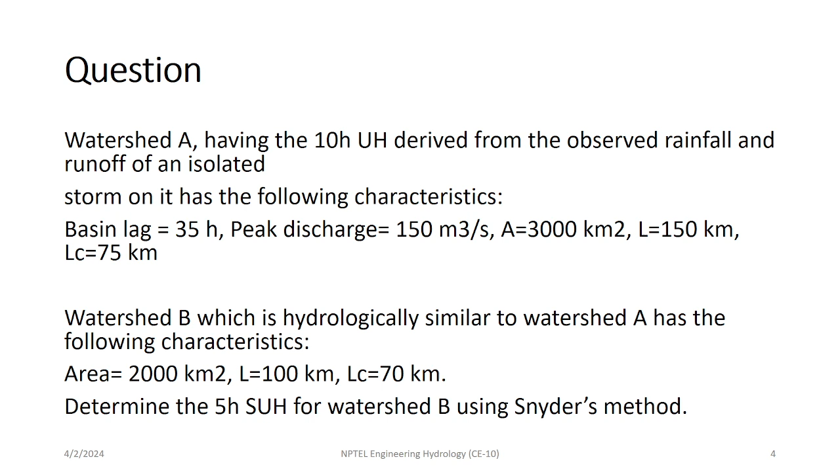so here the question was how we can plot a 5h synthetic unit hydrograph for watershed B using Snyder's method. Whatever procedure we have followed, it will be the same. The difference will be the approach, how we plot it. So I want you to just look at the procedure, how we are going to solve it, and later you can execute some of the problems for your deeper understanding.

Okay, so here, whatever plot we have to make, the entire question is divided into 8 or 9 steps, and within these steps we will look step by step at the major parameters we have to determine. Here you can see the first one is watershed A, and its properties are mentioned here. Basin lag is given, peak discharge is given, area is given, length of the catchment is given, then length of the catchment to the centroid is also given.

Then for watershed B, it is the required hydrograph. For A, we already have a unit hydrograph. So how are we going to convert? I'm sure you know what we need to do in order to plot a required hydrograph: we should have two major coefficients, right? Can you name them?

In the earlier question we computed two major coefficients from the known watershed, and then transferred those coefficients to the unknown watershed, right? Those coefficients were Cp, and one more, which one? Cp was the coefficient for peak discharge. Then there was Ct, related to time, right? From here we were getting the basin lag time, then time for the peak, and using Cp we were getting the information about peak discharge.

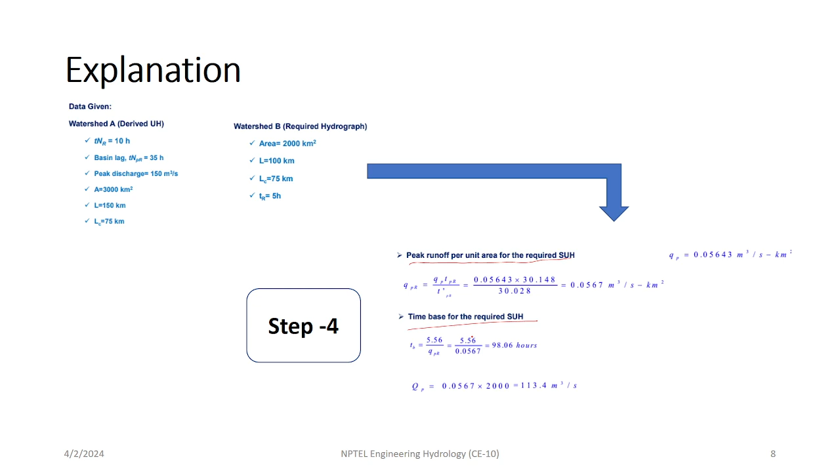Then peak discharge has been computed per unit area, and time base we have got for the required unit hydrograph. So based on that we could have an idea of how much peak it is going to. So we will have the maximum ordinate it can go to, and basin lag we already have, so accordingly we can compute the base width, base period, how much maximum width it can attain.

Then if we want to plot the SUH, it has mentioned that we should have three major widths. First one is this entire base period, time base, we should have this entire width. Then we should also have the width related to 50% of peak discharge. So this width we also need to compute in order to plot this graph.

And then there should be a known width for 75% of peak discharge. So if we have these three major widths, then we can easily plot this graph, though we have to smoothen it after plotting. So here you can see there are certain empirical relations given in order to compute the base width for 75% of peak discharge. Then for computing the 50% of peak discharge, it is given here. So using these empirical relations, we can derive these widths.

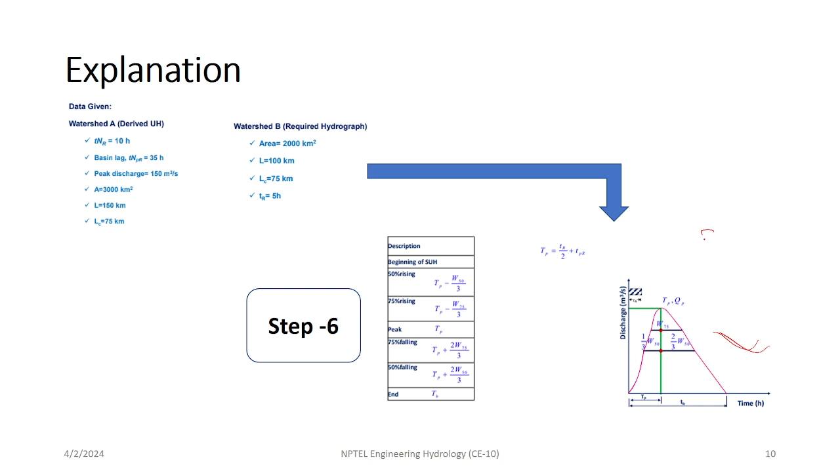Okay. Now after getting these, you can see the picture here. Now you can have some approximate plot of this SUH, synthetic unit hydrograph. Still it needs some correction. You can't say that whatever values we are getting are correct. One more thing I want you to note down: before attaining the peak, the width is taken as 1/3, and after the peak it is taken as 2/3. We have already looked into these things in an earlier session also.

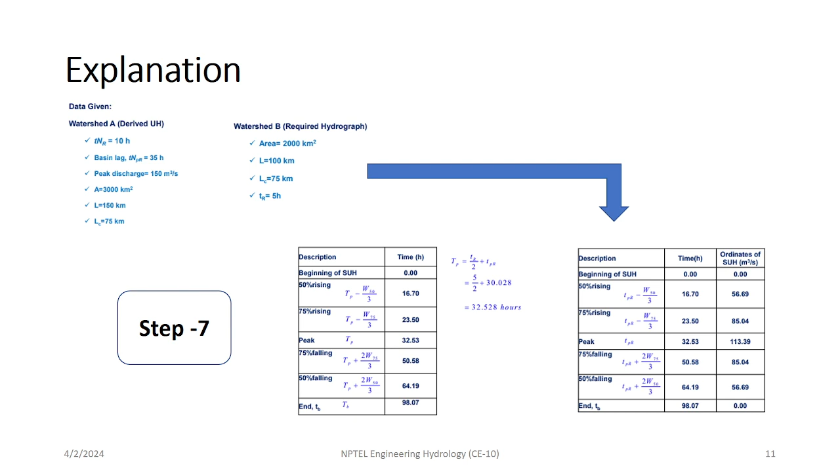So whatever values we have computed till now, values related to time, values related to width of the hydrograph, those values have been plotted along with the peak discharge, and this graph has been found. Now these are some details which have been summarized here. Okay, so this question ends here.

I hope you are getting the difference. There is only one major difference here: these width values should be known in order to plot this graph, else there will be difficulty. Because if you only have the time base value, you know the width only, and you are simply saying that I have a peak value of this much. So definitely here also you will be assuming a triangular kind of thing will be plotted. But you know that this triangle assumption won't hold everywhere.

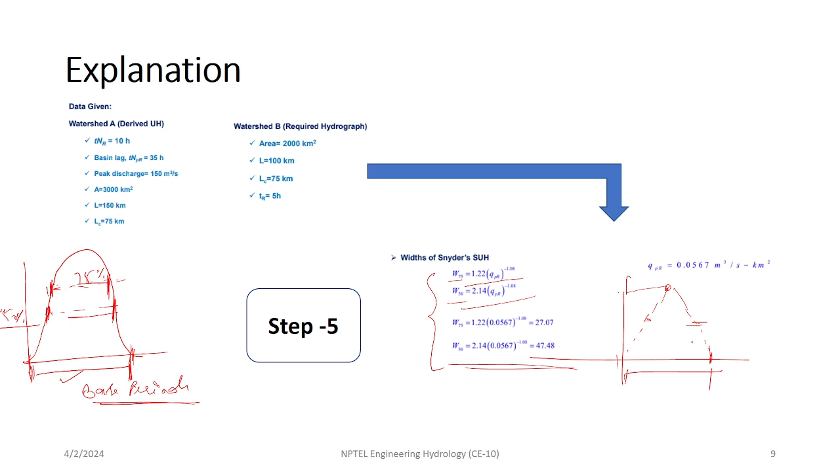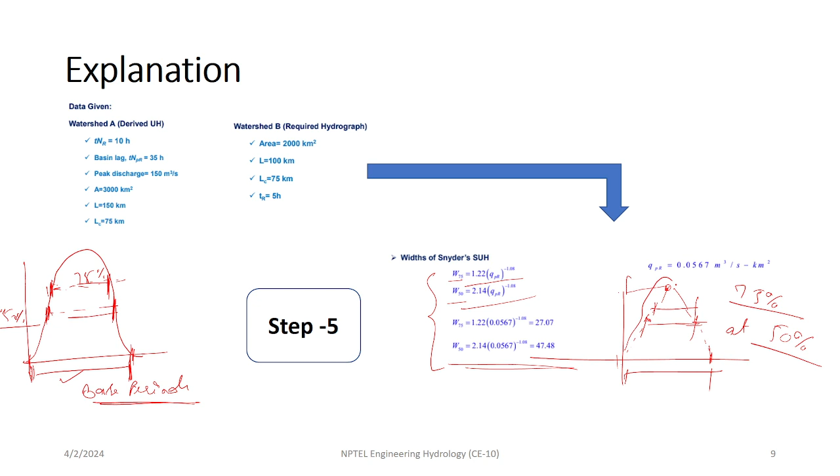So what you have to do is take some more values between these lines. So in order to make it possible, these widths at 50% of maximum discharge and 75% of maximum discharge have been computed, and then they have been plotted in order to get the smoothened curve. I hope you are getting this.

Now we are moving to the questions related to today's session. Today's session we are going to cover the topic of flow routing. I hope you all have gone through this concept, right? Routing. So I want you all to just give me a brief understanding, your understanding, of what you understand by flow routing. Okay, anyone?

With the knowledge of the upstream flood, getting a hydrograph at the downstream section of a river or any watercourse. Yes, right, that's a good one. Anyone else? Ashish, do you have any input? I think it represents the change of hydrograph when the water moves from upstream to downstream. Yes, right, yeah.

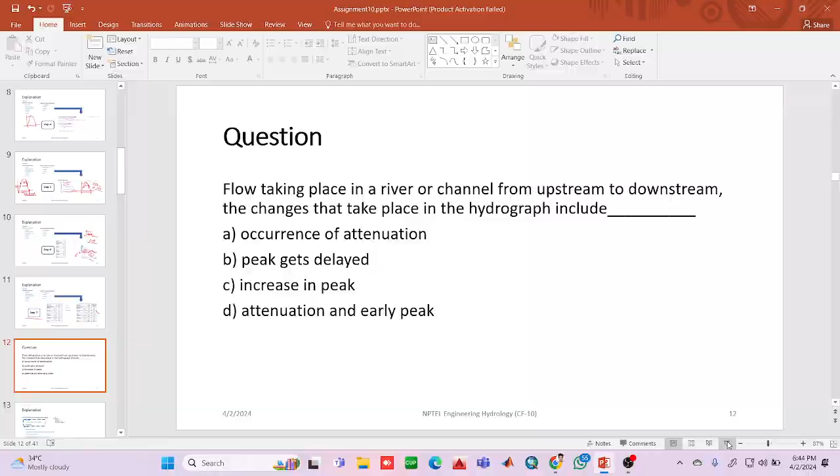So here the question is: flow taking place in a river or a channel from upstream to downstream, the changes that take place in the hydrograph include. So it is saying that if we have a channel and a hydrograph at this location, and we are trying to get a hydrograph either downstream or maybe upstream as well, what could be the possibility? What kind of things can exist? That is the question.

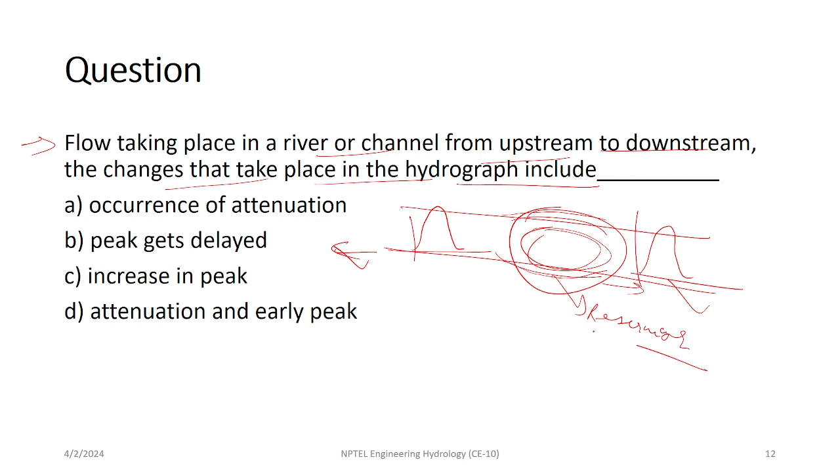So in that case, the width of the channel as well as the depression will be acting like a kind of reservoir. It will be storing a certain amount of water, and that is why it could have an effect in reducing the peak values. So whatever peak you are getting, a certain amount of water has been stored in the reservoir, and now you are having reduced peak values, right?

And also, whatever water is now going to flow after this reservoir, there is a chance that the peak values you are getting could get delayed also. So in this case, attenuation occurs. This entire flow routing concept is much more relevant in terms of reservoirs, because once the reservoir is constructed, the hydrograph will have more impact in its scale, right?

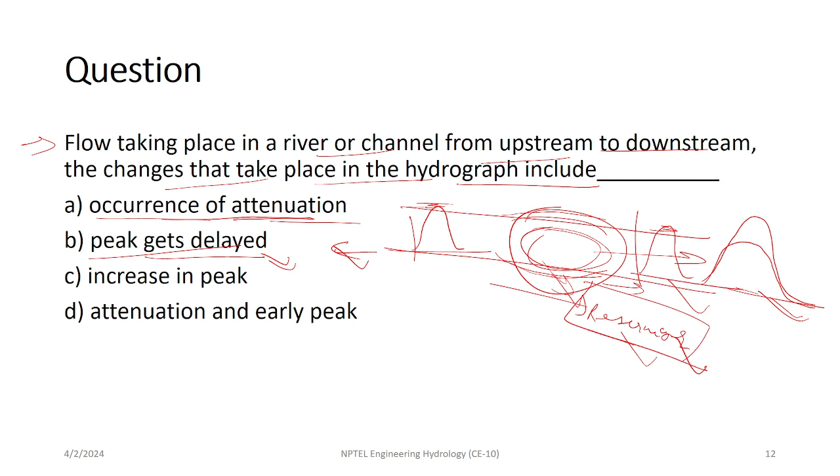Okay, so here the thing will be like occurrence of attenuation. Peak will be getting depreciated, and then another one will be a peak gets delayed. Okay, so here from upstream to the downstream flow takes place. So first aspect is attenuation, and the flow can also get delayed. And what are the applications of this? You can see here that if we are using a flow routing concept, we can easily derive a unit hydrograph as well as a synthetic unit hydrograph.

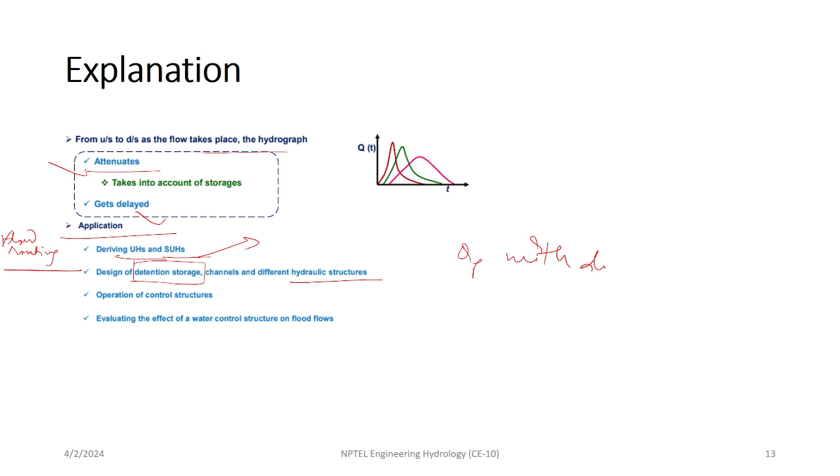Then why is this flow routing important? We can design a detention storage in terms of a hydraulic structure. Hydraulic structure could be anything, like it could be a canal, a culvert, or a dam we are making along the channel. So in designing those, we should have an idea about the peak flows QP with respect to the duration as well as length in the entire channel.

If I'm taking a section 1, section 2, section 3, what is the maximum QP I am getting, what is the width of the river here, and what is the duration, like time to peak. This information is relevant in order to design any hydraulic structure, because we have to control the volume of water that is coming as an inflow. So that is a task we need to do.

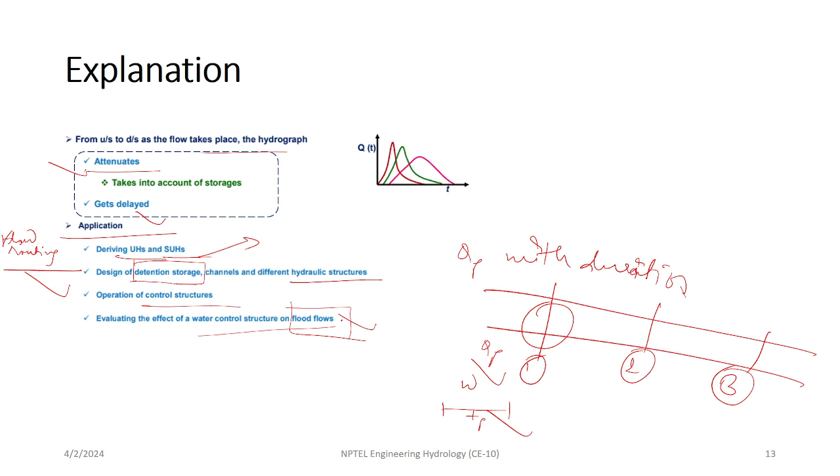So here it was also mentioned that control structure is also one of the things flow routing can do. And at the last, if we want to control the flood flows, in that case also flood routing is important. Okay, now moving to the next question. It is related to flood routing. In flood routing through a reach, the point of intersection of inflow and outflow hydrographs coincides with the peak of the outflow hydrograph.

So it is saying that we are doing a flood routing along a reach, and once we have plotted an inflow hydrograph, and then after some time the outflow hydrograph has been plotted. Okay, so here you can see there is a certain intersection between the inflow and outflow hydrographs. Wherever they coincide, you are getting a point of intersection. And what it is mentioning here is that this intersection point is the Q peak, the peak flow of the outflow hydrograph.

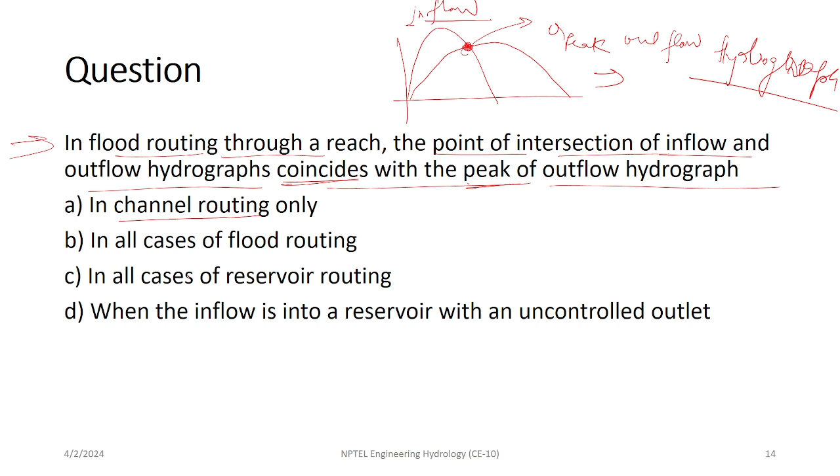So where could this possibility occur? That is the question. Okay. So I'm sure you may be getting terms like channel routing, flood routing, and reservoir routing. There are certain assumptions which are holding all these concepts together. So have you gone through this?

No, no. So here, flood routing we are plotting, right? So for this case, option D will be valid: when the inflow is into a reservoir with an uncontrolled outlet. Uncontrolled outlet means whatever the maximum volume of water

is stored by a reservoir, if it reaches this level. I am saying that a reservoir is there, and there could be a maximum flood level to which it can hold the water, because after that the structure is not going to bear the water pressure. So definitely there could be some engineer operating a spillway, diverting that water to the downstream part, right? So there could be some maximum value to which it can store that water.

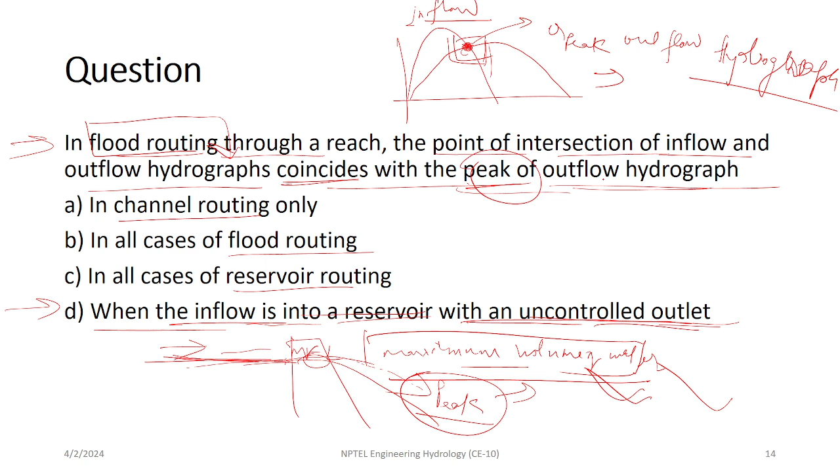So in this case, when the inflow is into a reservoir with an uncontrolled outlet, means inflow is coming and the reservoir is not holding any water because it is already at its maximum level, whatever the outflow is, that will be at its maximum value. The question was asking about the peak of the outflow hydrograph. When you are operating this reservoir at an uncontrolled flow, you will get the intersection point at the peak of the outflow hydrograph.

So look into some of the explanation here. Firstly, I just want you to see some of the basic concepts. During the rise of the outflow hydrograph, the inflow is greater than the outflow, so build-up of storage in the reservoir will be done. It is saying that inflow is higher than the outflow; in that case, build-up of storage will be there.

If there is a recession of the outflow hydrograph, means outflow is greater than the inflow, water will be getting depleted from the reservoir, so depletion of the storage will be there. In the third case, when the outflow hydrograph has receded, the reservoir returned to the initial level. So in that case, build-up of storage in the reservoir will be done.

In this box, there is one important line mentioned here: at maximum storage, outflow from the reservoir will be uncontrolled. Maximum storage means the maximum volume of water the reservoir can hold. If it reaches that level, whatever outflow you see will be uncontrolled.

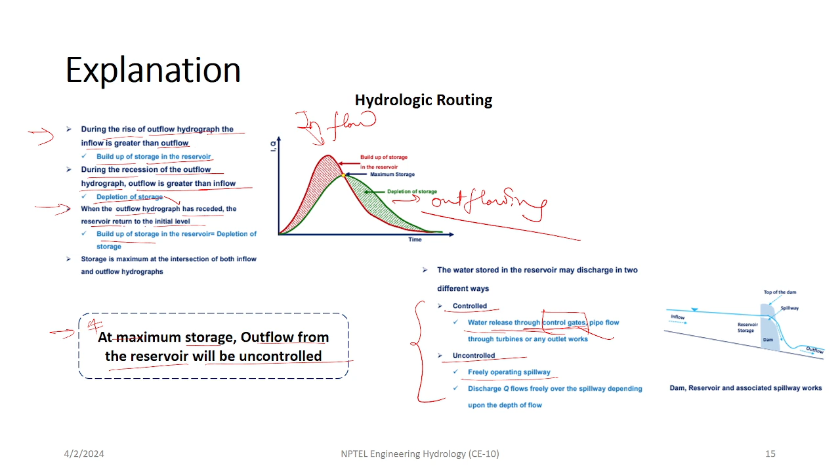You can see here some more keywords have been mentioned. When we say controlled, water releases through control gates. Whatever spillway gates are working over the dam, they work in a controlled way. But when we say uncontrolled, they are made to open, they are freely operating now, there is no control in the discharge. Okay, now moving to the next question.

The question is related to the Muskingum method of flood routing. You may have an idea about routing, right? There are two types of routing we perform. Tell me them. One is hydrologic routing. Yes, hydrologic routing is there, and another one is hydraulic routing. And what are the differences? I think hydrologic routing uses the continuity equation for calculation. Right, good one.

And in case of hydraulic routing, it uses both continuity and momentum equations. Combining both these equations, one famous equation has been derived: the Saint-Venant equation. Are you familiar with this equation? It is one of the most widely used equations to simulate the dynamics of a flood wave.

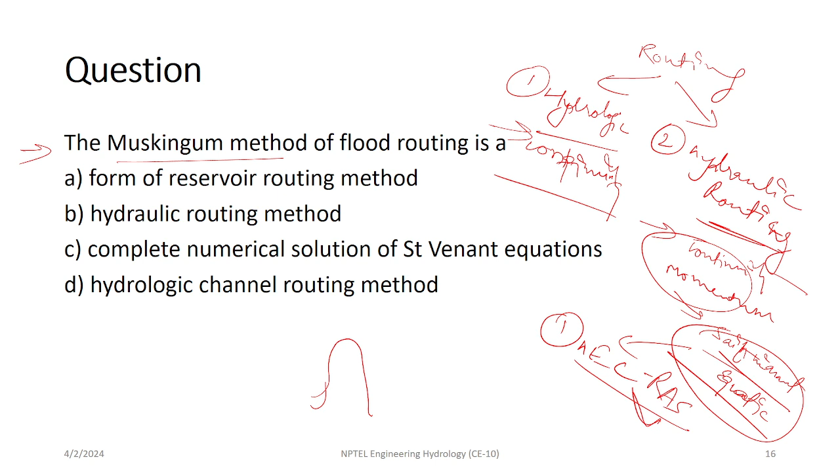How much time, if you have an idea about the hydrograph from the origin, where the maximum rainfall has occurred, and now at the outlet of this basin we have received a QP, meaning maximum discharge, of maybe 15 billion cubic, right?

15 BCM has been achieved, maybe after, you can say, 30 minutes of rainfall. Okay, I'm just saying it as an example. Now there is one city downstream of this catchment; you can call it Surat city. I'm just taking an example. There is Surat city in Gujarat. It is highly developed; it is an economic backbone of India also.

So this entire water will be diverted to a river only. And if a surplus amount of water is coming directly into the river and going downstream, where there is Surat city, then definitely there could be a possibility that the entire excess amount of water gets diverted into the floodplains of Surat city. And if there is no control over these river banks, then definitely this entire city would collapse.

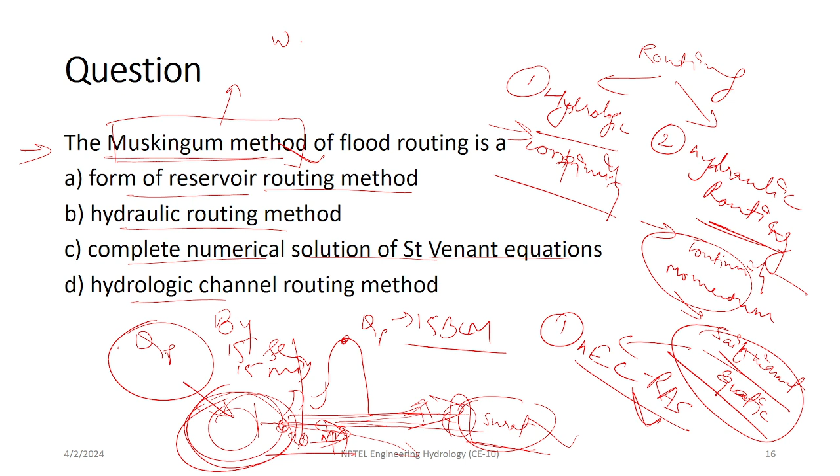With reference to this, I can add one more thing. You may have studied two major concepts. One was prism storage. Have you studied it? Have you come across this word or not? Prism storage. And there is one more word, wedge storage. These two words are used in the Muskingum method only. Okay. So this entire Muskingum method tells what? Any idea? No idea.

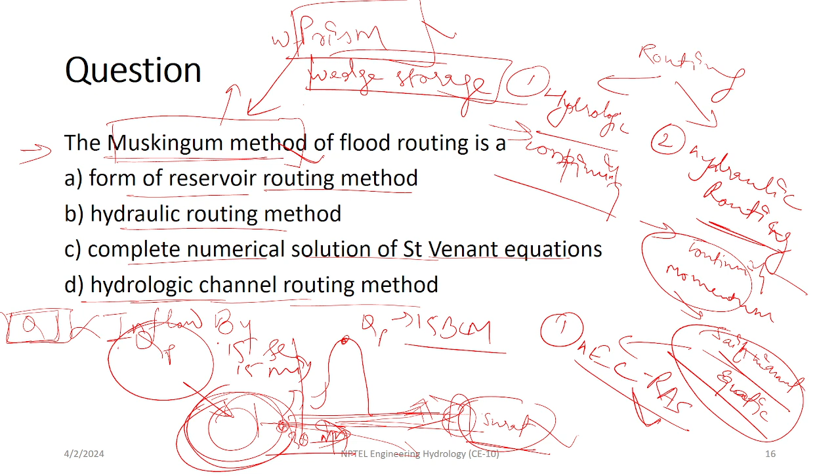So here the Muskingum method is a form of hydrologic channel routing method, where the outflow will have a relation with the inflow. Which kind of relation, we will discuss in the explanation. So here you can see the routing process is divided into two major aspects: hydrologic routing and hydraulic routing. In hydrologic routing we use a continuity equation or a flow-storage relationship.

This entire concept is a lumped model. Lumped routing in the sense that for the entire area we are getting only a single value. But if it is distributed, we are getting values at different locations also. So here you can also see that variation with respect to time is considered, but with space it is not considered. That is why, since there is no spatial variation, the word lumped is used. I am assuming that the entire basin has similar characteristics.

But if I am saying that in the region values are varying with space, if I move from one point to another, values are changing, then I will call it distributed flow routing. And for distributed flow routing, you should have an idea about the continuity equation and momentum equation, and if we combine both of them we get the Saint Venant equation. And it can vary in both space and time.

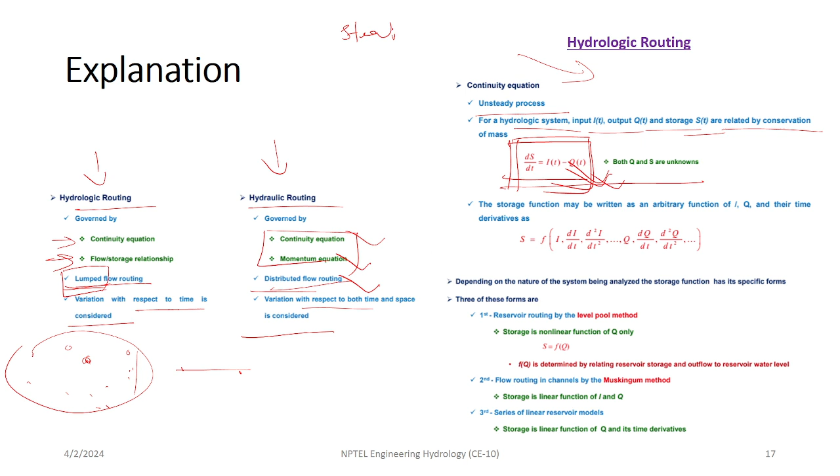See, the continuity equation can be divided into two major criteria. If I am saying steady state condition, like for each time whatever input is coming is directly converted into an outflow, in that case you all have studied what kind of equation we use. Q1 equal to Q2, right? Q1 equal to Q2. Am I right or wrong? Yes.

So whatever the inflow is coming, it is directly converted into outflow. But if I am saying that it is unsteady, changing with time, then the storage concept will be used. And that is why you will be getting the difference of inflow and outflow; it will be stored as storage. So for these kinds of things, the continuity equation in the unsteady case is important.

And see how this storage is varying; it is dependent on inflow and outflow. So this could be expressed in this form. After combining these two major relations, we can derive the Muskingum equation also. So these two major concepts have been used in the Muskingum method. We will see some numericals related to this also.

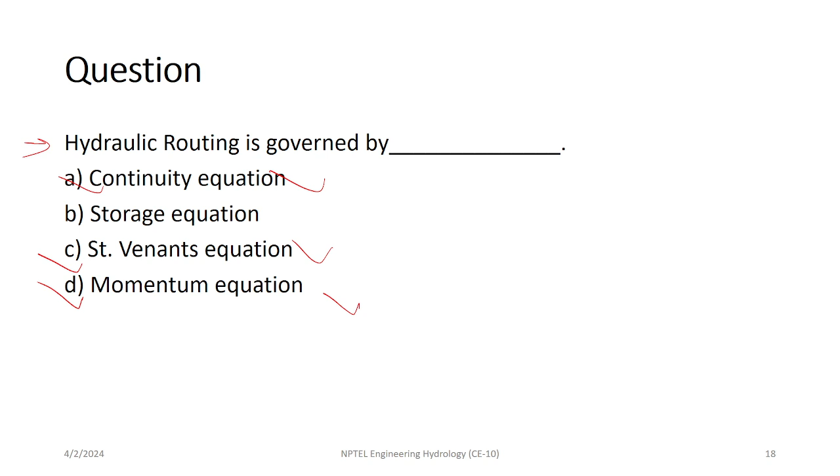Ma'am, is it clear to you? Yes, yes. Okay. It's clear.

How can you simulate them? Because if you are assuming or ignoring certain parameters, then you will have steady, uniform, or non-uniform kinds of scenarios you can develop and implement into your model.

So these equations are directly useful while we are modeling a flood, or the hydrologic modeling we perform in order to predict the volume of water distribution in the basin, where we are getting a surplus amount of water, where we are getting a reduced amount of water, where we need reformation in reservoir operation. In that case also these equations are much more relevant.

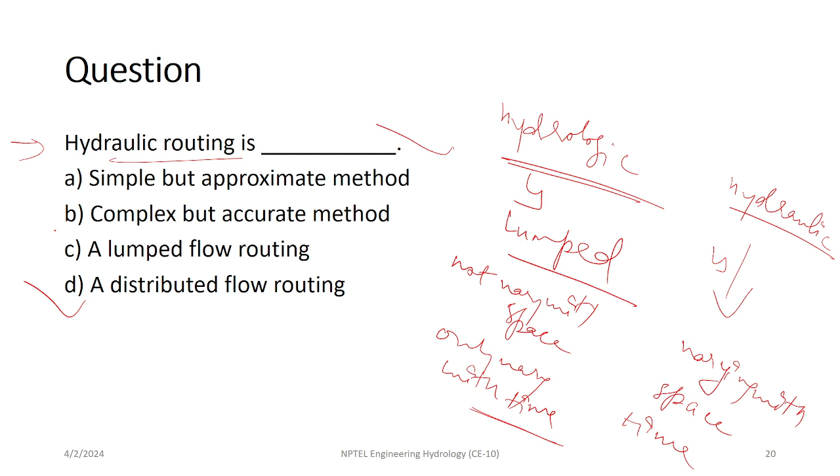So here, don't confuse this: it is distributed flow routing, and it is complex, but it is more accurate in comparison to hydrologic routing. So if you are talking about hydraulic routing, it is more accurate than hydrologic routing. A very useful method in distributed rainfall runoff modeling. Rainfall runoff modeling is nothing but hydrologic modeling.

Most people used to use a kind of water balance equation. You may be familiar with this water balance equation. Okay, so this water balance equation, and they are deriving the rainfall runoff modeling.

Now in the third option you can see simulation studies in the catchment. Just I mentioned there, simulation studies have been made. So in order to quantify the inflows, in order to quantify the outflows, and as well as the storage, these three aspects, if you want to model it, we can use the simulation studies.

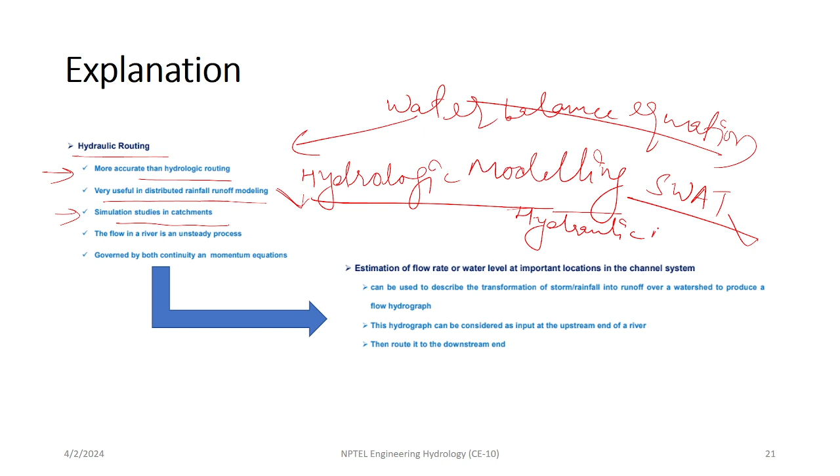From my point of view, I can mention, if you have not explored, there is one famous hydrologic modeling called SWAT, right? Soil and Water Assessment Tool. And if you want to simulate a hydraulic modeling, I will mention a model called HEC-RAS. Just I mentioned here HEC-RAS. You can explore these things.

Okay. Then there is one more thing, hydraulic routing, is that it is an unsteady process and governed by both continuity and momentum equation.

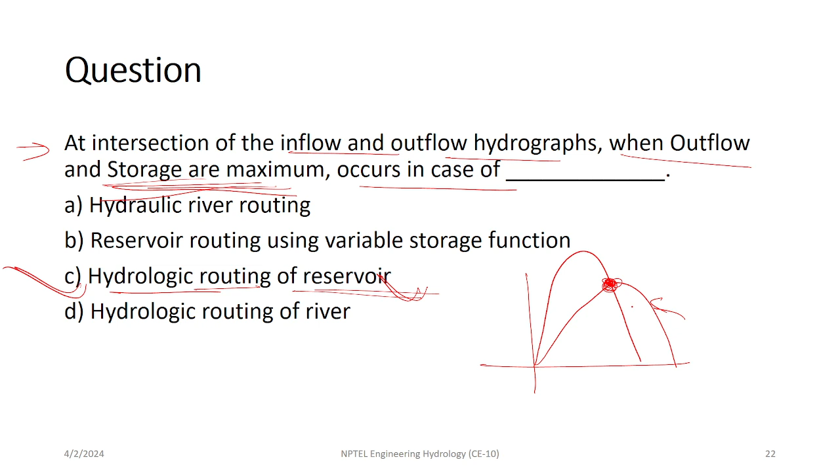So see here, this graph you can see here directly. First graph is showing the inflow, and then second graph is showing the outflow. So in the peak of outflow you are getting an intersection, and at that point it is mentioned maximum storage will occur here. At this level maximum storage of the reservoir will be done.

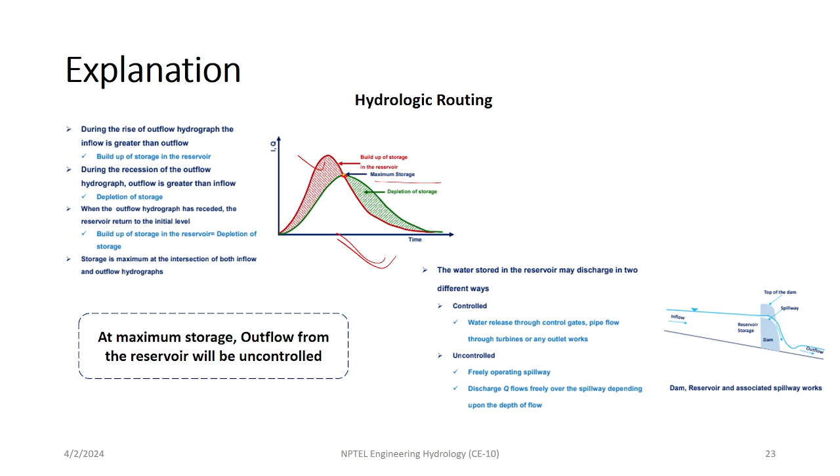Now people working nearby the reservoir, whoever is operating that reservoir, they will be seeing these curves, and once they are seeing that, there will be some indicator that now the storage is getting more than the threshold values. So it will be called an alarm. Now what kind of alarm? Because now people have to open the gates. Instantly they have to open the gates, because they can't store excess water after that storage. So these kinds of things will be more useful while we are operating the reservoir.

Okay, now moving to the next question. During the passage of flood wave, prism and wedge storage in a channel is. So I hope, just I mentioned that these two concepts are useful in the Muskingum method. Okay, so it is saying that prism and wedge storage in a channel is. So firstly you have to tell me what is prism storage and what is wedge storage. Any idea?

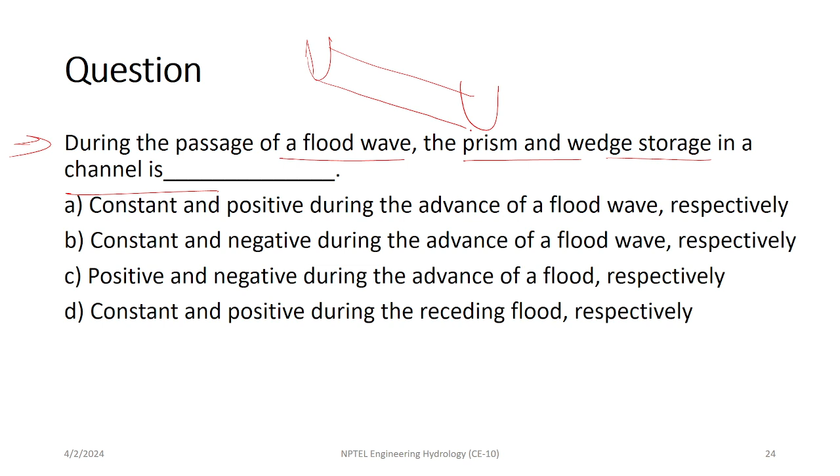I have just plotted a kind of flow scenario. So now from the base to the water level, maximum water level. Okay, if it is normal, whatever the inflow is coming and outflow is going, there is no additional inflow coming, it is called normal flow passing through a channel. In that case, whatever water level you are seeing could be assumed as constant, and this entire area you can call prism. Prism in the sense what? It is not changing.

Okay, then if any additional inflow is coming, surplus water is now entering this cross section, so you could have a certain kind of water level change like this. It could distort like this. In that case, whatever excess area you are getting in the form of a triangle could be called wedge storage. Am I right or wrong? So now it is asking about the behavior of these storages when a flood wave is passing.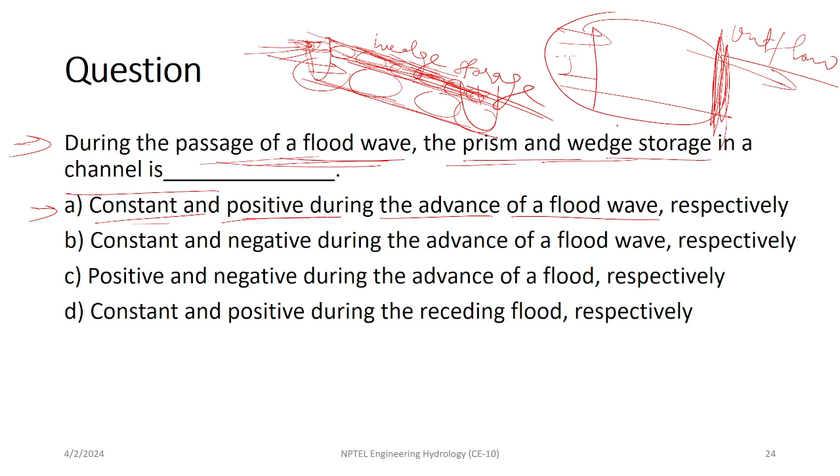Okay, so it was asking about the passage of flood wave, so here it will be constant and positive during the advancement of flood wave. It is asking about the upstream side only. Got it? Just the passing of flood wave, it is just entering the inflow section. If it said it is receding, the flood wave is about to pass out, so the behavior would be seen at the outflow section. But it is just entering this section, so that is why it is taken as positive.

Okay, now moving to some numericals. Regarding the Muskingum method, as I just mentioned, in the Muskingum method storage is a function of I and Q, inflow and outflow. So there will be some relation established, with some weightage to I plus some weightage to Q, and these weightages are given after considering two storages.

You have seen this word storage everywhere. In the previous question we discussed what types of storages are possible: first a prism storage and another a wedge storage. Giving a weightage to both these storages, we can achieve this kind of empirical relation, and this entire concept has been used in the Muskingum method. Weightages are nothing but coefficients, so coefficients have been given.

So do you have any idea related to the Muskingum method, what kind of empirical relation is there? Any idea? And what is the relation between these coefficients? There is a relation between C1, C2 and C3. Three major coefficients have been taken in this Muskingum method. Any idea? Can anyone solve this question?

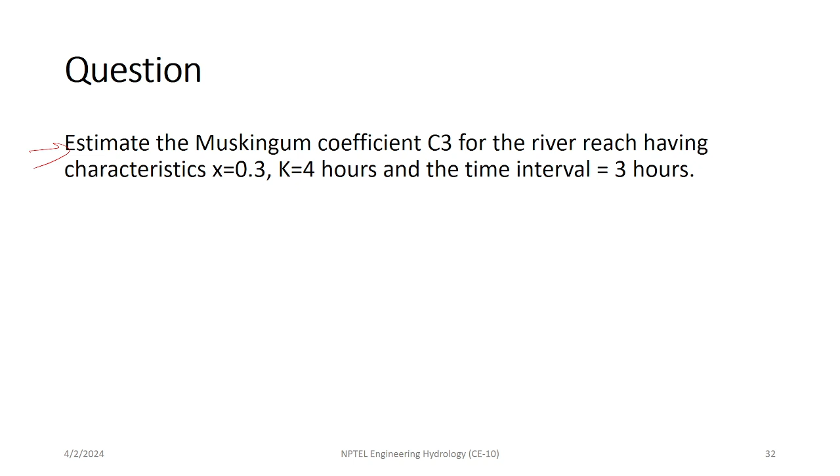Okay, now compute C3 for the same thing and tell me what you are getting. Can we see the formula, please? Yeah, I'm just showing you. See, here C3 is equal to 2K(1 minus x) minus delta t, then 2K(1 minus x). Here the more important thing is to look into the sign, plus or minus, because if you are changing those, then you will be getting a wrong answer directly.

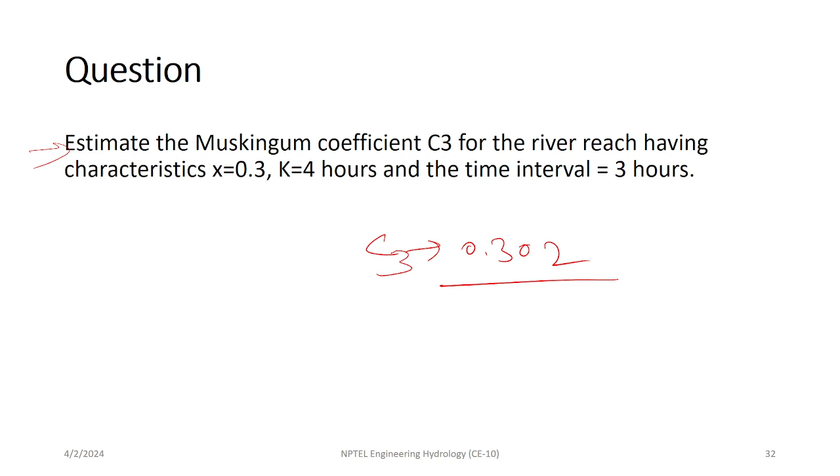K value is 4. 2 into 4 into 0.7 minus 3. 4 into 0.7 plus 3. 8.6. 0.302. Okay, you are getting how much? 0.302. Balamurugan got this answer or not? Yeah, he also got the same answer. Okay, then definitely okay, no issue. So the answer is 0.302, that is coefficient 3 for the Muskingum method.

Okay, now we are moving to the next question. That is an important question. So here see the information related to a river reach. The river reach characteristics are x equal to 0.18, k equal to 4, and the time interval delta t is 2 hours. Route the flood hydrograph through the river reach provided that the initial outflow value is 75 meter cube per second. So the initial value is being given directly.

It is asking what the attenuation is. So attenuation will be what? It will be the difference in the peak of inflow and outflow, QP of inflow and QP of outflow. If you have this information, you can subtract them and get the value of attenuation. Just from the picture you can have an idea that this is an inflow hydrograph, and then there is an outflow hydrograph plotted. This is the peak of inflow and this is the peak of outflow. If you take the difference, this is called attenuation in the peak.

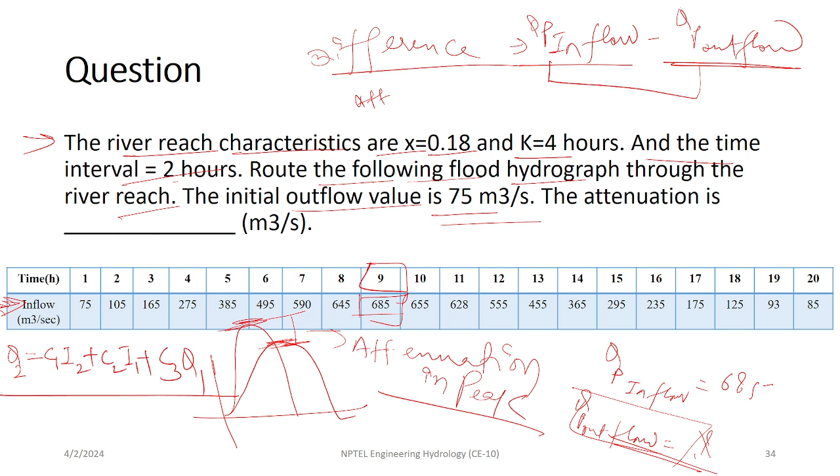So Ashish, if I want to compute Q2, what do we need? It is saying that the initial outflow is 75. So from this graph you should have an idea that this is an initial outflow value. You can take it as Q1. So now you have an idea about Q1. Ashish, any doubt in this? No, because it is mentioned in the question only. Yes.

Now, do you have any idea related to I1, the inflow at initial time? It is directly given in the question itself. At 1 hour, what is the inflow? 75. Yes, so I1 is 75. What about I2? I2 will be the inflow at time t equal to 2 hours. So it will be 105. Now what's left?

C1, C2, C3. So first we have to compute the coefficients C1, C2 and C3. Then only we can solve for Q2, and likewise compute Q3, Q4, Q5, Q6 up to Q20. After looking at these values from Q2 to Q20, we will find the maximum value, subtract it from 685, and get the attenuation. So our first task is to quantify the coefficients C1, C2 and C3.

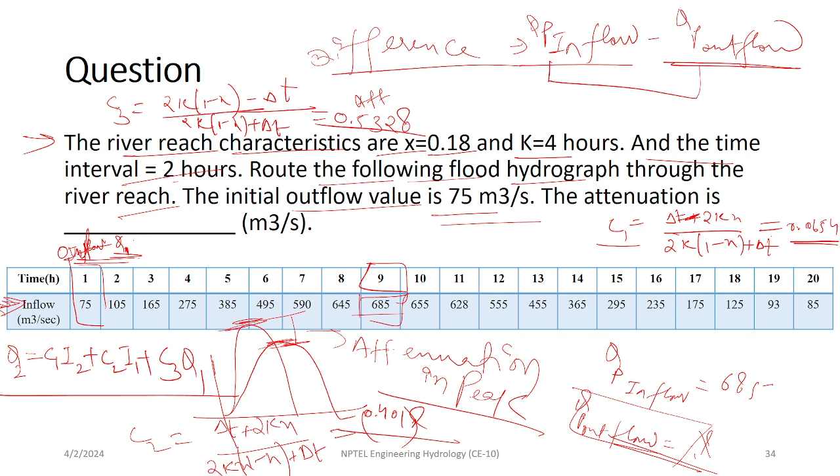Balamurugan calculated this one. What is the value for C3? 0.5328. Okay, let's check whether the values you mentioned are all correct. Yeah, 0.5328 is correct. 0.4019 is also correct. And 0.0654 is also correct. All correct. Good.

Now from the equation, Q2 equals 0.0654 I2 plus 0.4019 I1 plus 0.5327 Q1. Now I also have information related to Q1: Q1 is 75, I1 is 75 and I2 is 105. Now compute Q2, how much are you getting?

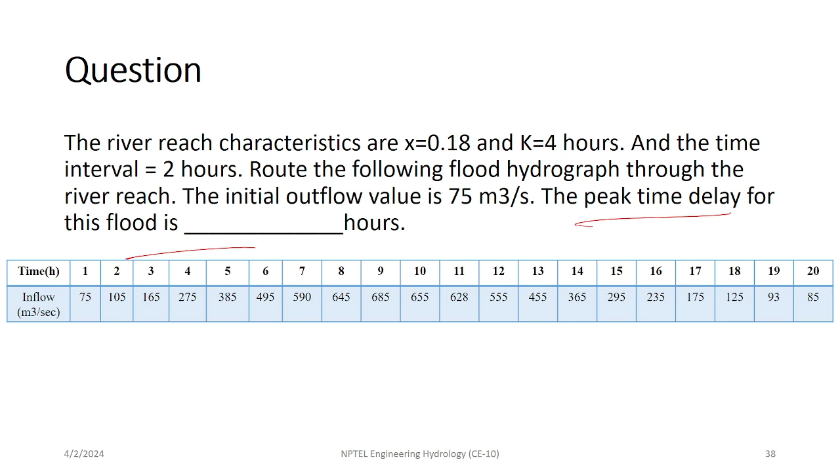so whatever values you got after plotting this, with the similar procedure, whatever C1, C2, C3 values we are getting. Okay, and at the last you can see the difference. For the inflow, what was the time? It was 9 hours, right? Yes. Now for the outflow, the maximum peak is seen at what time? 11 hours.

Yes. So now what will be the delay? Delay in the sense, delay in their peak. This is the delay. Got it? So we need to subtract this and we can directly get 2 hours. Got it? Okay, got it.

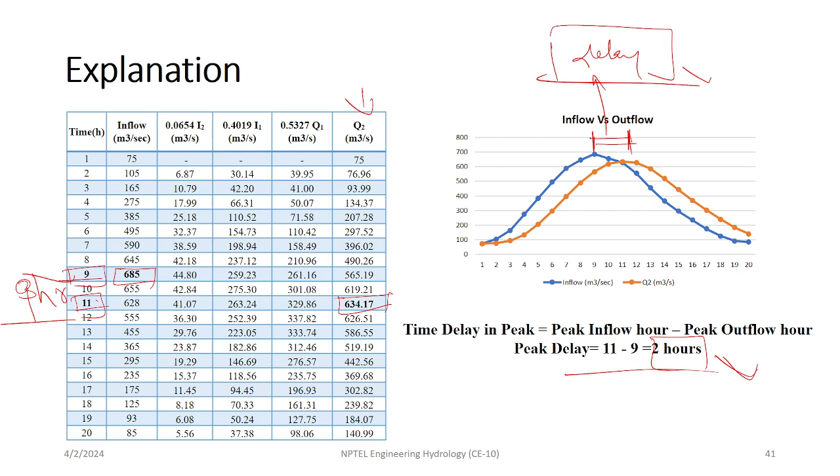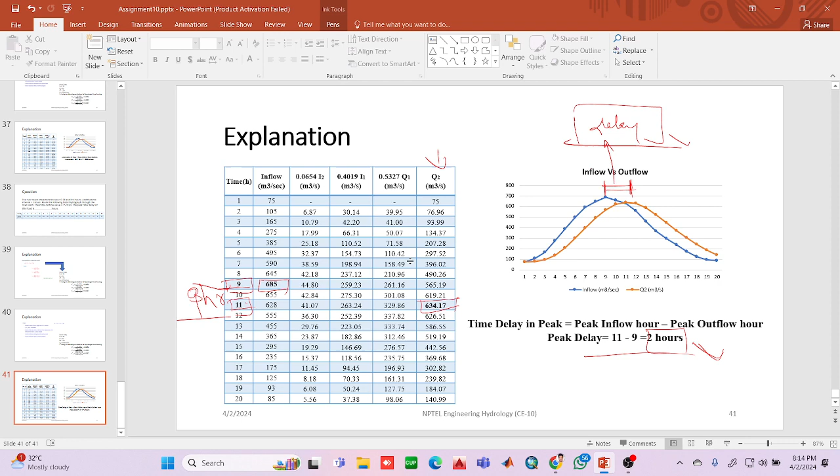Okay. One more small information. 3 problems we worked last week are wrong. What? I wonder. The last week assignment problems we discussed and worked, 3 answers are marked wrong. Ma'am, what were those questions? Can you tell me? I'll refer to my Swayam assignment and tell you. That is 10, 11, 12, I think. 10, 11 and 12.

Can you tell me the concepts on which those questions were based? No, we just get the reply that the answer is incorrect. Shall I give you the range of answers? Yes. For the 10th problem, the answer is set as 62 to 72. We found a mistake, corrected it, and got 32.04, right? But that is marked incorrect for the 10th problem. What was the question? Can you read the question?